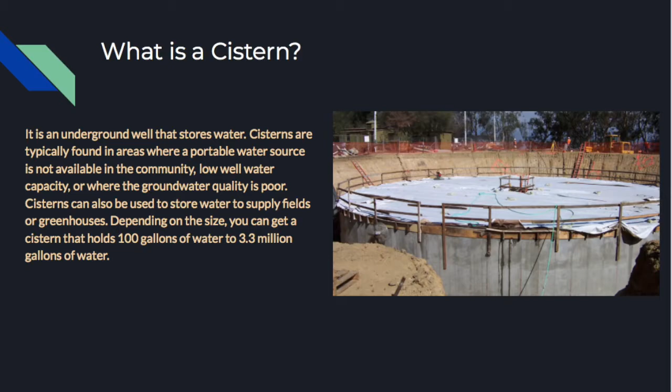History/background. Rainwater catchment is a cornerstone of human civilization. The ability to capture and store water enabled the development of irrigation agriculture and improved quality of life on many levels. Since the commodification of water and the development of distribution systems in the 19th and 20th centuries, many of the industry have turned away from rainwater harvesting.

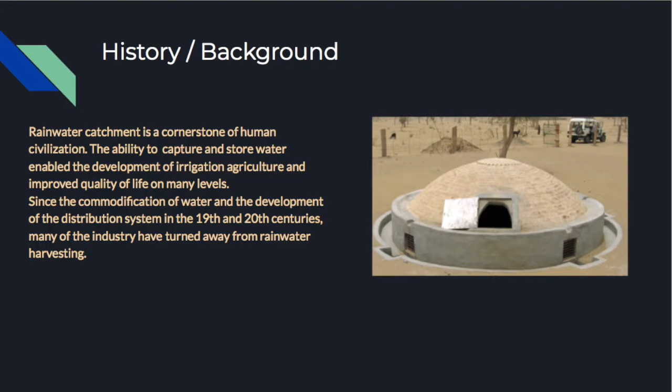Benefits of cisterns. The main objective of collecting water is to make water available for future uses. It can also help decline water bill costs every year, giving reassurance that each time you water, you will always have more than enough. Also, you are using pure water, meaning that there's no chemicals, bacteria, or any contamination.

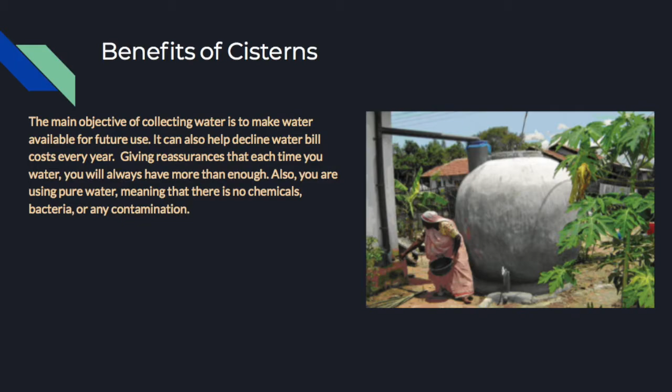Types of cisterns. Cisterns can come in many shapes, sizes, and materials. Some of the materials include reinforced concrete, fiberglass, polyethylene, and steel. When customers are looking for cisterns, they want to be aware of what can rust, leak, price of materials, and how long they can last before they start to wear. Size, shape, and cost typically influence material selection.

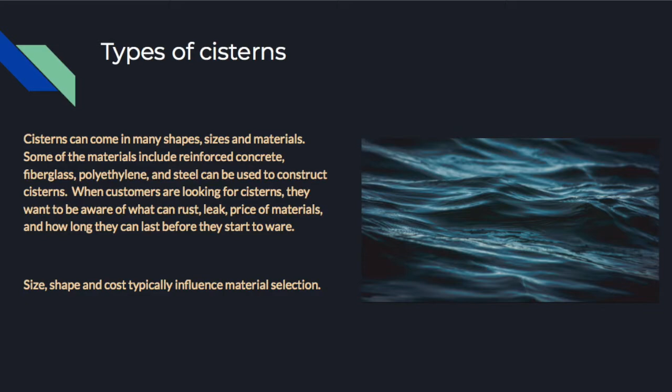Fiberglass tanks. They offer high pressure ratings and resist corrosion. They are mostly used below ground and can be sized up to 60,000 gallons and 12 feet in diameter. While long-lasting, they are often not the most economical choice and require special care during handling and installation. They can be overpriced due to shipping and handling. In most cases, fiberglass tanks can be beneficial, but if someone was to buy one fiberglass tank, it is recommended that multiple tanks are required for a larger cistern system.

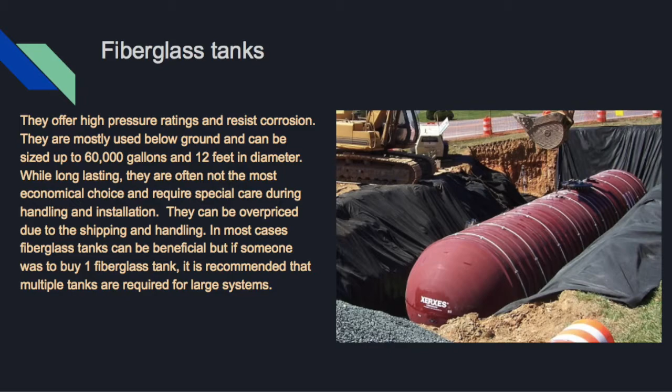Steel reinforced polyethylene, SRPE. Steel reinforced cisterns are newer to the market and combine the longevity of polyethylene and the strength of steel in an efficient and economical package. These tanks resist corrosion and can last longer than 75 years. It is easily patched in the field if damaged and can handle burial as deep as 30 feet. For cisterns larger than 20,000 to 30,000 gallons, they can also be the lowest cost option. It is leak-proof and can be up to 50 feet long.

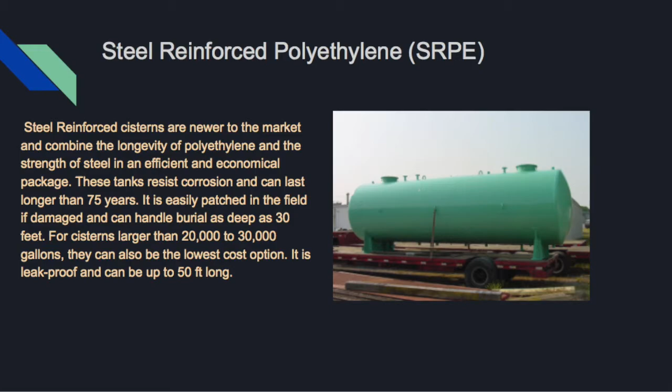Concrete structures. They can be precast for faster installation or cast in place to suit specific site constraints. Concrete can develop leaks over time from cracks and, in most cases, will need to be drained to seal the leak. For small to medium-sized systems, concrete can be a more expensive option. But for a large system, concrete structures may offer a better economic value and are worth consideration where the cistern will be under high loads.

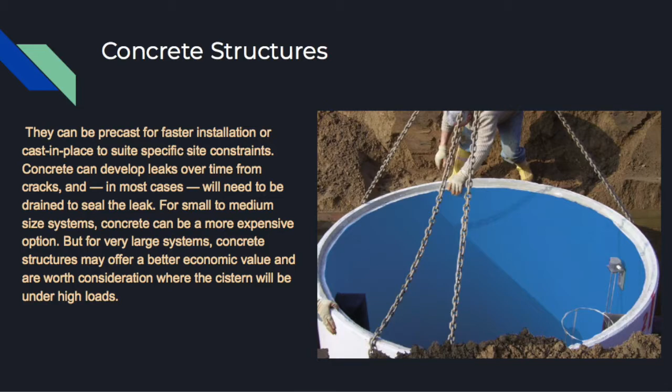Storing water. The cistern size depends directly on how much water is used and how often water is being collected. Those who buy cisterns are encouraged to do research before they buy so they don't get a cistern larger than what they need. Oversizing a cistern will affect the quality of the water. Storing water too long might also affect its taste and odor. Making sure that the cistern is collecting water on a weekly basis is important. The higher the frequency of water delivery, the better the water quality will be. The water supplier should be able to assist you in determining an appropriate size for your cistern.

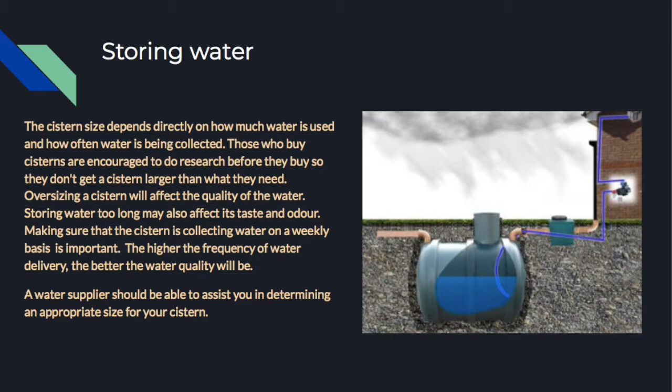So why do you need a filter system? Filtration, disinfection, and purification are the steps to get rid of debris in water. Contaminants may include algae, air pollution, bird droppings, leaves, sand, and dust. Local wells have dealt with these problems for decades. The EPA requires surface and groundwater to be disinfected before it is consumed or used in agricultural uses. This is also necessary for rainwater, as the natural environment contains many microorganisms. Most are not harmful to us, but installation of filtration and purification equipment can remove these contaminants at home as well.

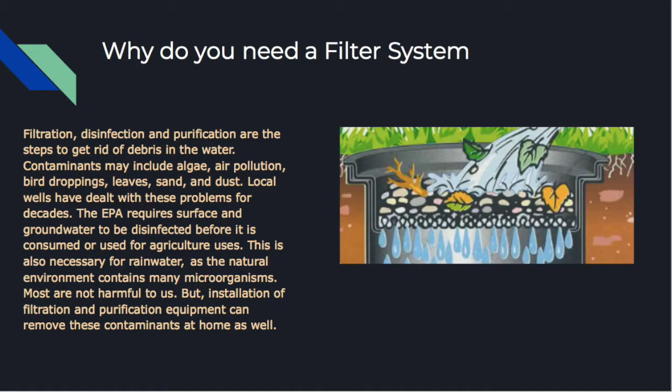Maintenance. All cistern systems need to be maintained to continue operating effectively. Unfortunately, many owners today do not care that it is not functioning due to a lack of maintenance. Maintenance cycles are 5 to 10 years or longer in most cases. It is important for engineers to design access points for cleaning, inspection, and repair to ensure the owners benefit from the system for the full life of a cistern. If they are not looked after, it can decrease the operation life.

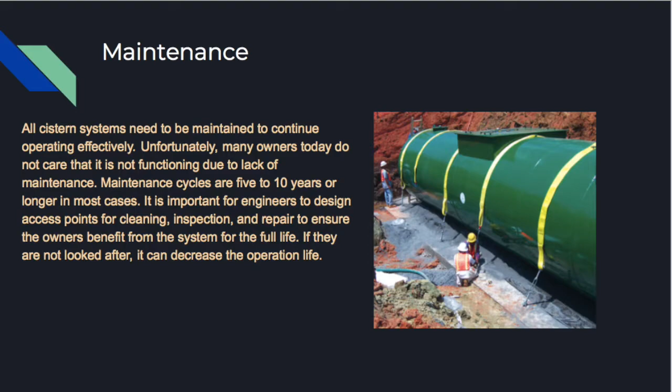Why can't the owners clean it themselves? In order for a cistern to be properly maintained, it must be entered, or often we use a pipe camera to closely identify and inspect for deficiencies, surface water and groundwater inflow, or any other potential risks. A cistern must never, ever be entered until the cistern air quality is tested and deemed safe. No cistern should be entered unless the person entering the tank has been trained in confined space entry and follows the appropriate safety procedures. Oftentimes, however, entry will not be required, primarily for residential application.

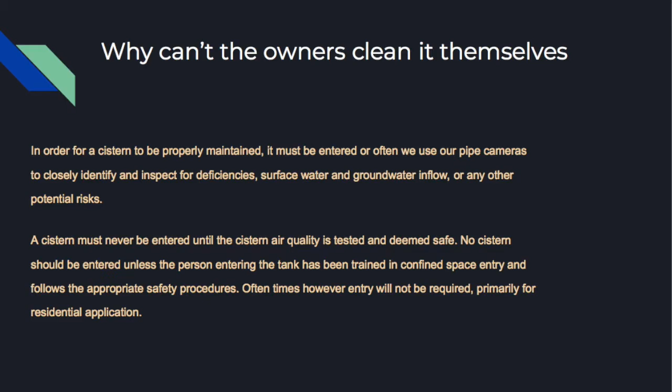So why should we use cisterns? According to the World Resources Institute, an environmental think tank, inside the 1.3 billion tons of food wasted every year worldwide is 45 trillion gallons of water. This represents a staggering 24% of all water used for agriculture. Agriculture is already the world's biggest user of fresh water. This sector accounts for 70% of all uses around the world. In saying so, using cisterns can help decrease the world's use of fresh water, whether individuals collect it on their own by using dugouts, cisterns, or water wells. We should always be aware and thankful of how we have easy access to water.

In closing, the research I have found has shown me that I should be thankful to have the clean water that I have, and that I should not take it for granted. This research has opened not only my eyes, but my family's eyes as to how much water the agriculture field actually uses each year. This has made my family buy a small above-ground cistern for the time being. Since we have had it, it has not only given us fresh water, but it has also shown us how much we use each time we water our plants. This has made my family recommend this to those around us and to help preserve the water we take for granted.